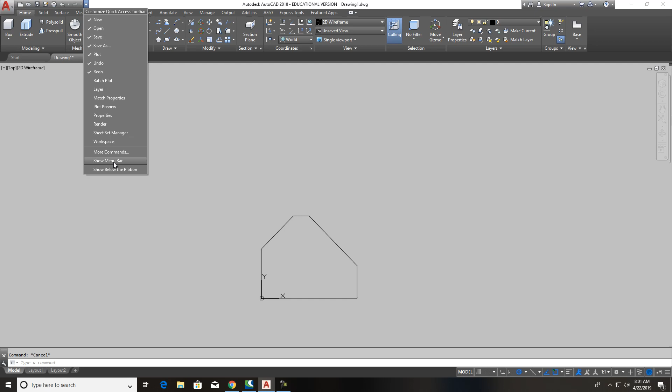So after I do that, I can do an extrude. Now I do need to bring up my tools. I always like to have my tools on here. Let me open this up to where I can actually see it. Show menu bar, tools, toolbars, AutoCAD.

I like to have my UCS on, and I also like to have tools, toolbars. I like to have my view on there, and we'll turn this to Southeast Isometric. It's a good one. And I want to do an extrude.

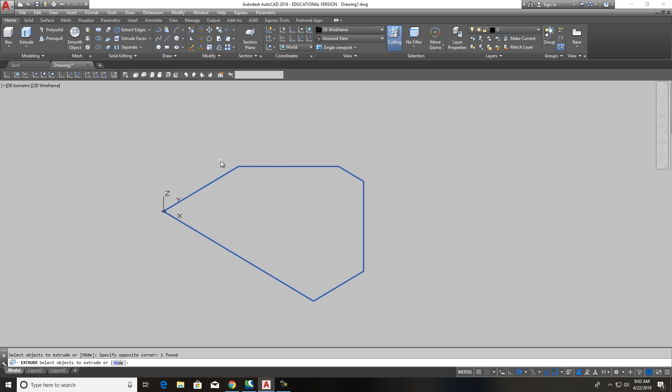I'll hit extrude. I'll grab this and right click to enter. Then I can add my depth to it. And this thing, if I go back over and I look at my depth, is 3 inches. So I just type in 3.

Well, didn't do it. Let me undo that. And let's go back into it again. Extrude, enter, and type in 3.

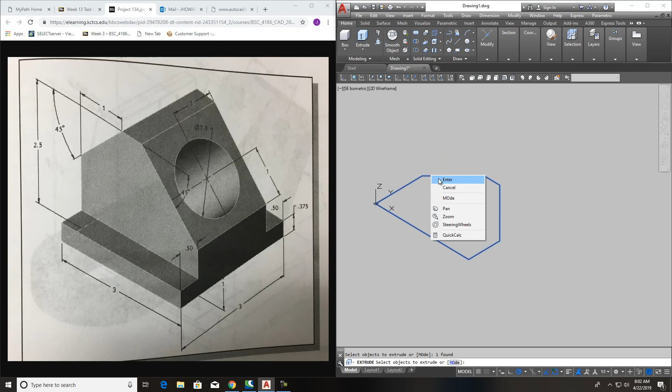There we go. Now I want to rotate this around, so I get my tools, go toolbars. I like my orbit. There's my orbit tool. I can take and turn this.

Now, this thing is my view that I'm looking at it right now. I've got it in wireframe. There we go. I want to turn it into conceptual or something so I can actually see it in a three-dimensional look, solid look.

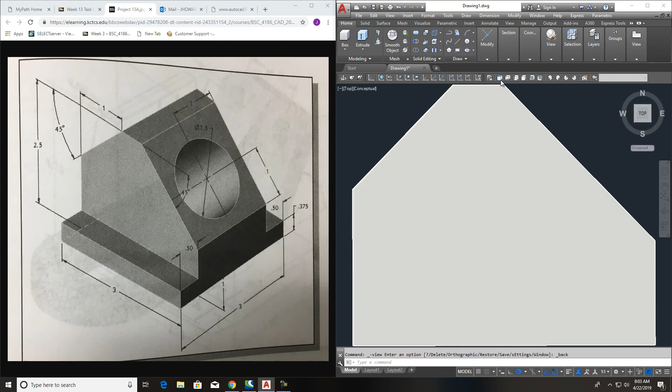And now I just got to cut these sides out of it like this, and to do so I'm just going to turn it, look at it straight on, just like that. You can actually use these tools up here too, and it'll automatically set. It's pretty cool, and it will set everything up for you.

Alright, so now what I need to do is cut these sides out. They're 1/2 inch coming up 3/8. All I'm going to do is pretty simple. I'm just going to come in here, and I could actually do a box too if I want to.

Let's use box. And what I want to do is hit at, and as far as the depth down through here, I can do something, it doesn't matter. I just make it something like that.

I'm just going to make it something like that, and then push it all the way through, just like that. Just one big old piece like that. And now what I can do is I want to go back to Wireframe.

Check this out. If you go up here and just make yourself a line right there and come up here, 0.375, there's a little end point right there. Now check, and then what I could also do is I can hit that, and I can come up this direction 0.5.

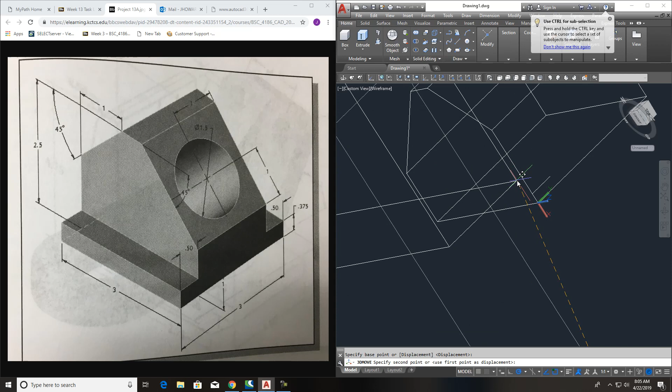So all I have to do is just grab this, come up here and do a modify, a 3D move, and I can catch that point right there, and then come over here and catch that point right there. So I've got this thing now. If I go back to views and look at it in 3-dimensional or solid, do you all see how that's setting in there? And I want to mirror this as well.

So I go back to modify, and I'm going to do a mirror. If I can find it. Here it is. I grab this, right click to enter, catch the midpoint of this, midpoint of that, enter. I got both of them.

I want to cut them out. And then go to your boolean tools up here and subtract. Click on what you want to keep, which is this, right click to enter, and then click what you don't want to keep, right click to enter.

It's getting closer, isn't it, guys? It looks a little bit more like it, doesn't it? So we are getting closer. I'll put this back in our world coordinate.

Now check this out. I want to put this hole in it right here. So I come up here to 3 point. You catch this point, and you can't catch that one. If something happens, you can go back to wireframe, and it will let you do that. Because sometimes when you're in a 3D mode, it won't let you click on everything.

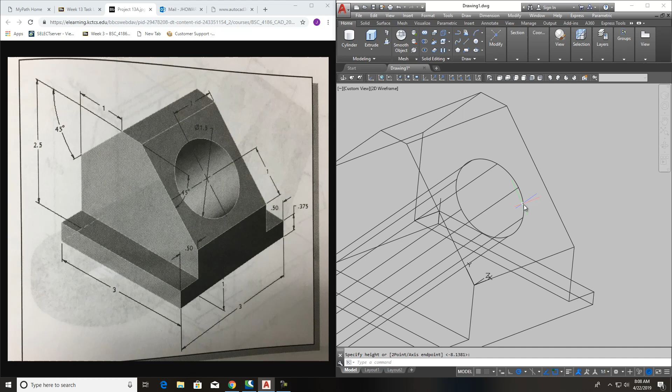There we go. And I want to take and I'll just put me a cylinder in here. And cylinder, and we'll have to adjust it and line it up. And what I'll do is I'll just put it all the way through, just like that. And now what I need to do is make sure it's exactly 1 inch from here up.

So I hit line right there. I'll follow that line up 1 inch, and I'll come straight across. And then I'll just grab this and do a 3-dimensional move. Again, modify, 3D move. Pick your object you want to move, right click to enter. Catch the midpoint of it. There, to right there.

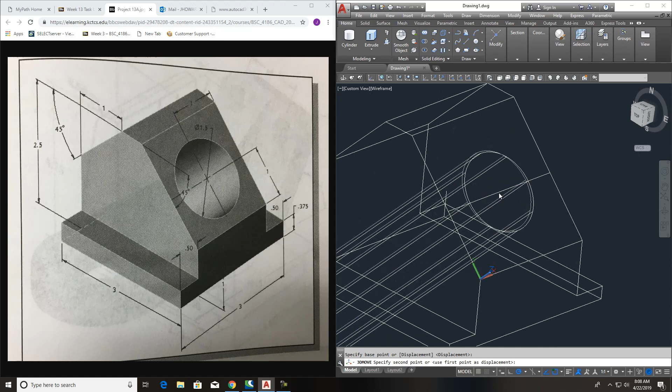And then just come in here now and do a boolean subtract. Click on what you want to keep, right click, and then click on what you want to delete. And now if I go back into views and do a 3D realistic or whatever, you have got your drawing completed.